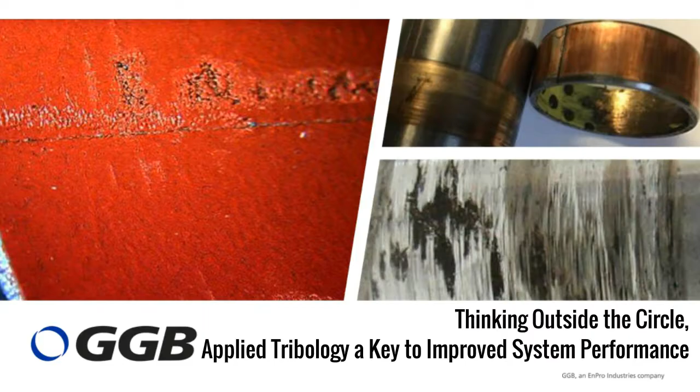Thank you very much. So today's slides are about thinking outside the circle, applied tribology, a key to improve system performance. But in the next slides, I want to quickly give you an introduction of GGB, what we can offer, and to whom we belong. GGB is proud to be a part of EnPro Industries.

Who is GGB? GGB has more than 115 years of experience in providing solutions to reduce friction, optimize product design through innovative plain bearing technologies. GGB can offer comprehensive selections of products to meet the world's most demanding surface engineering needs. We manufacture metal polymer, engineered plastics, fiber reinforced composite, metal and bimetal bearings, along with a range of supporting assemblies like bushing blocks and thrust plates.

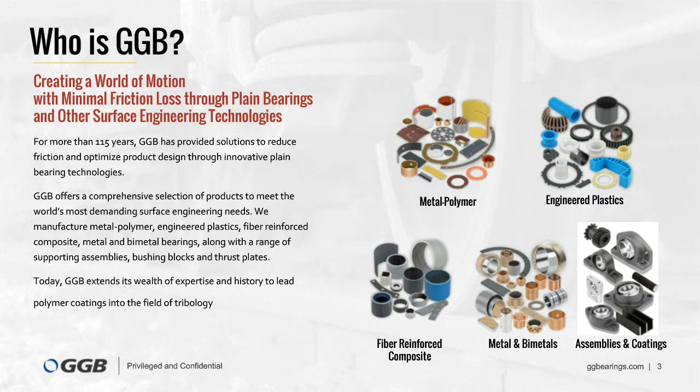Today, GGB extends its wealth of experience and history to lead polymer coatings into the field of tribology. The advantage of working with GGB is that we are your complete tribological service provider for the following industries: aerospace, automotive, industrial, agriculture, construction, oil and gas, energy, fuel, fluid power, primary metal, recreation, solar, and packaging.

Our comprehensive approach to understanding the complex science of interacting surfaces represents GGB's evolution from a parts supplier to a global tribological consultant. We proudly provide both manufactured components and engineering expertise to help our customers with their unique needs to create better surface engineering solutions. Our comprehensive understanding of tribology allows us to apply our expertise to any surface regardless of shape and material.

With this being said, I want to hand it over to my colleague, Marco Enger.

So thank you, Andreas, for the introduction. Before we get started, I also thank everyone for joining this webinar. Today's presentation is part of GGB's Tribology University, or in short, GGB's TriboU. The idea of TriboU is to share knowledge around tribology and all related subtopics. The topics normally cover the basic theory about tribology. Other topics focus on applied tribology and how this can be used to improve the performance of tribological contacts and thus the performance of mechanically engineered aggregates. So today's presentation is of the second nature, but don't be afraid, I will do a short introduction into tribology before we get started with the applied tribology topic.

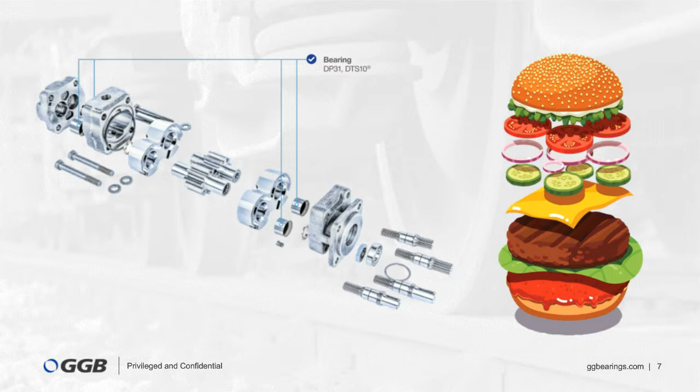So let's start with some basic theory about tribology. The first important thing is to understand what's behind the science of tribology. So the best way is to take a look at the definitions of the term tribology. The first definition is the easiest: tribology is the science of friction, wear, and lubrication. The most common definition is the science of contacting surfaces in relative motion and all related topics and techniques.

Another definition which I really like is that tribology is a multidisciplinary science in which advances are made by collaborative efforts of diverse scientific fields. So tribology is often accompanied with mechanical engineering, manufacturing, material science, medicine, chemistry, and physics, and many more. This sounds very complex, but I will try to give you a brief overview of the main ideas behind tribology and how we can use that to improve the system.

The interesting thing about tribology is that we can find it nearly everywhere. So during the next slide, I will introduce a few tribo contacts found in many daily routines we have. And I'm pretty sure you will be surprised how many contacts you can identify after seeing that slide.

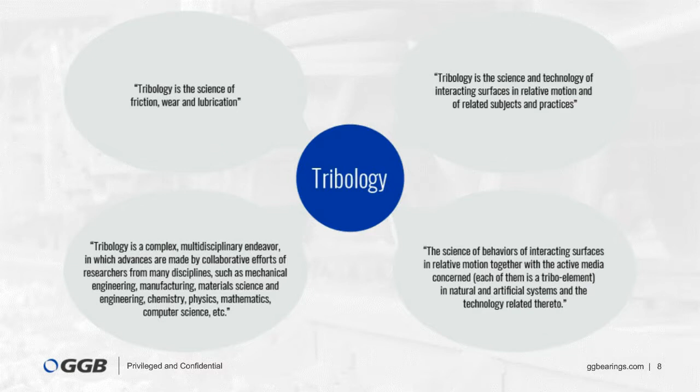Using the car to drive to work is also accompanied with tribology. A car is a very complex vehicle containing many tribological contacts, and one very well-known contact is between the tire and the road. The human body also contains many tribological contacts, so each joint in the body of a human is a tribological contact.

Braking systems for bicycles or cars are also very important tribological contacts. Walking or ice skating is also a nice phenomenon of tribology. Walking or running would be impossible without friction. Ice skating would not work when the friction would be too high.

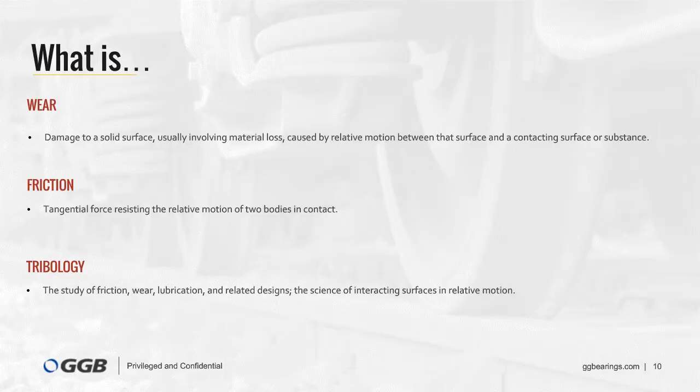This means that one surface is normally softer compared to the other surface, and this is based on design requirements. So the soft surface is normally the bearing material, and this is because replacing a bearing is normally the cheaper solution compared to a whole shaft replacement.

The other aspect is that we use softer materials, since normally these bearing materials work better in dry running contacts when they work against a harder opposing surface. For the bearing materials, we can find a vast variety of different materials.

A typically used material concept is the metal polymer composite. We can also find polymer composites in such tribological contacts. Coatings are also a great material family to lubricate tribological contacts, and other materials like fiber reinforced materials are also used for these dry running contacts.

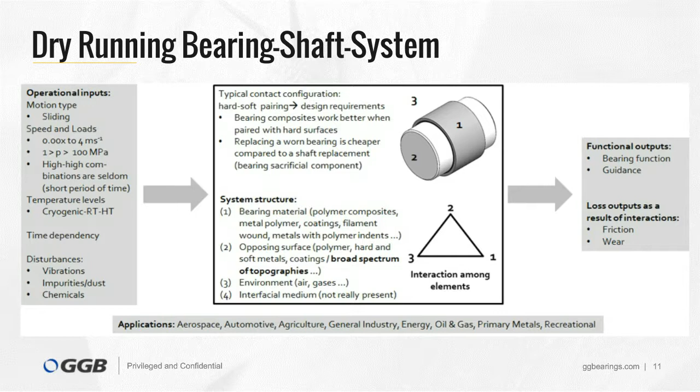At first glance, the counterface is a surface which attacks the bearing material during the relative motion. In reality, we never find optimal surfaces. What does this mean? Based on an engineering perspective, we always face technical surfaces in real applications. So if we discuss the impact of metallic counterfaces on friction and wear, we discuss the impact of metallic technical surfaces. The main purpose of technical surfaces is the geometrical limitation of technical components.

Other treatment processes like coating add an additional layer on top of that. Each single layer exhibits its unique chemical and physical property profile. In addition to that, the topography is also an essential characteristic of surfaces.

We often distinguish the topography in two ways. We can say that there are some surfaces which have an isotropic and anisotropic characteristic. What does this mean? Isotropic means that the topography has no orientation. We can also say it has a random structure, or that it's equal in each direction. For an anisotropic surface, we have exactly the opposite, so their roughness peaks and valleys have a preferred direction.

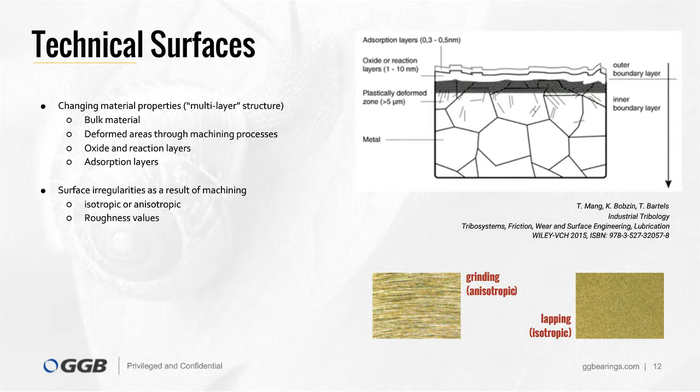So far, we already learned that surfaces have their own physical and chemical nature. We also know that surfaces exhibit surface irregularities. So what happens when such surfaces contact each other?

From a macro perspective, it looks as always. On this sample, we see a steel ball on a flat steel surface, and it seems to be an ideal contact. The microscopic view, however, shows that the surfaces only touch each other in those areas where we have these protruding surface irregularities. We tribologists call the sum of all these small areas the real contact area of a tribological contact.

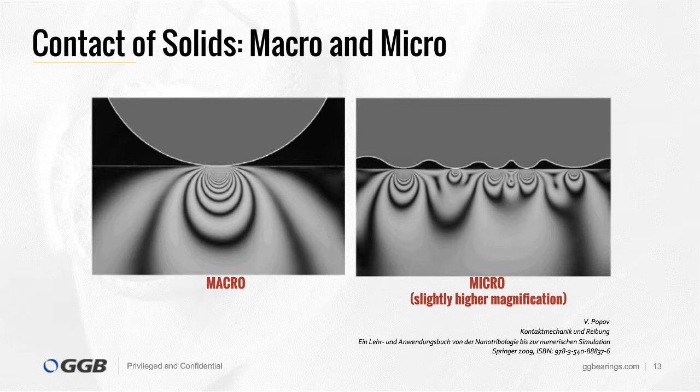The physical and chemical processes responsible for friction and wear are known as friction and wear mechanisms. As already stated, they occur at the microscale level of two contacting surfaces, in those areas where we have the contact of surface irregularities.

In tribology, we distinguish 4 main friction mechanisms and 4 main wear mechanisms. The friction mechanisms are adhesion, plastic deformation, plowing, and elastic hysteresis and damping. The adhesive friction component is a result of the formation and destruction of adhesive bonds within the real contact area. The 3 other mechanisms are based on a deforming interaction of asperities.

This brings us to the double nature of friction. Simplifying it, we can say that friction is the sum of an adhesive component in combination with a deforming component of friction.

The wear mechanisms are adhesion, abrasion, fatigue, and tribochemical reactions. The typical wear patterns are shown in the images below. Cracks are typical wear patterns for fatigue, often a result of repeated stressing of the surface.

Abrasion often leads to grooves and scratches because the harder asperity penetrates into the softer surface and furrows it throughout the relative motion. Adhesion often causes seizure and material transfer because of the formation and destruction of adhesive bonds. Chemical reactions can lead to particles which can also act as an abrasive in the tribological contact.

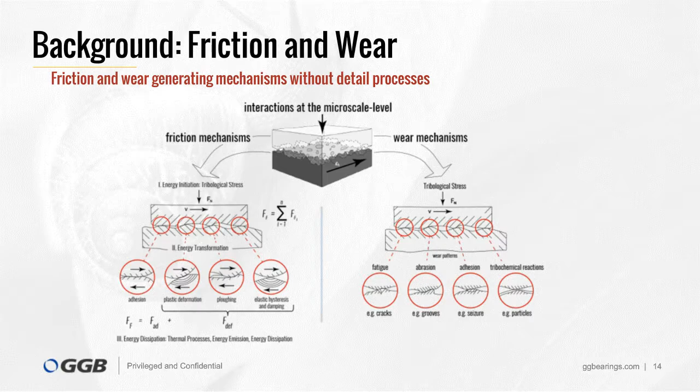Today, we will be looking at the impact of the counterface topography on the performance of bearing materials. Due to the vast variety of anti-friction materials, we decided to show you the impact on 2 typically used materials in bearing applications.

On one side, we have the metal polymer composite. This material is heterogeneous with a multi-layer architecture. Starting with the metal backing for high mechanical strength, we have a porous sinter structure which provides two things: high wear resistance, and at the same time a mechanical interlocking system for the slide active bearing liner. The bearing liner is normally composed of PTFE plus other fillers.

One important feature of this material is that it generates a protective transfer film on the counterface, which then protects the bearing material from further damage by the counterface. The second material we investigated is a typical polymer compound.

It consists of a thermoplastic polymer matrix, slightly modified using PTFE particles. The microsection shows that the PTFE particles are homogeneously distributed within the thermoplastic matrix. We know that this material can also form a pretty stable transfer film on the counterface.

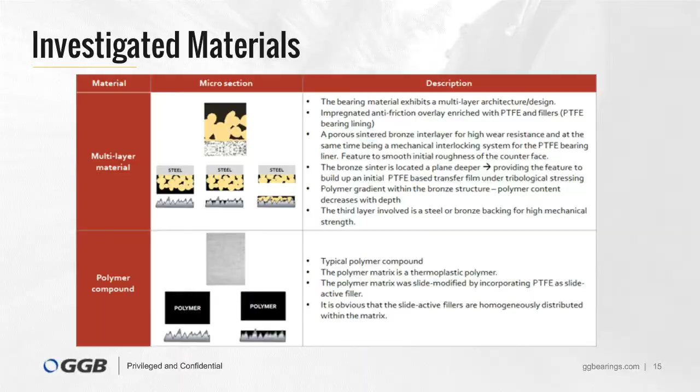During the last slide, I mentioned the word transfer film, and in that context I used the term protective. Transfer films are rather important for the sliding performance of a dry running contact. On this slide, I would like to explain a bit more about transfer films.

Most polymers and composite surfaces are worn by a harder counterface when used in tribotechnical systems. The inevitable wear of these materials when sliding against the harder counterface generates debris. The wear debris can escape from the tribo contact, but normally we hope that it stays in the tribological contact and deposits onto the opposing surface.

When the wear debris sticks, it can form a transfer film which protects the bearing surface from further damage by the attacking counterface by reducing its wear actions. So almost all tribologically optimized bearing materials exhibit the feature to establish a transfer film when sliding against the harder counterface. The transfer film is a very thin polymer or polymer-metal layer on the counterface.

Its thickness is approximately 100 times thinner compared to a human hair. This relation is given on the right side: the big circle represents the diameter of a human hair, and the small dot underneath shows the thickness of a typical transfer film. It looks like a pixel error, so don't worry, nothing wrong with your PC — that is the thickness of a transfer film.

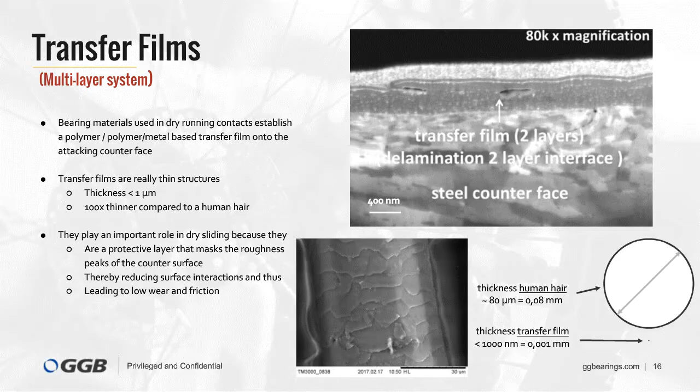Tribological testing is often indispensable when investigating interactions among elements of a tribological system. So we used wear experiments to describe the impact of the counterface topography on the performance previously described.

We used a flat-on-flat test configuration, realized through a pin-on-disk setup. The image on the left shows a schematic illustration of such a test setup. In this test, a small test sample pin is pushed against a flat rotating disc.

In our configuration, the pin is the bearing material, and the steel disc was made of hardened 42CrMo4 steel. This steel disc had different topographies, and the topography spectrum encompasses typical variants used in bearing applications.

On the one hand, we had a linear flat ground counterface, and on the other hand, we used concentrical grinding to produce the topography shown on the right side of that slide. Both surface finishing methods generate typical anisotropic surfaces, with a clear orientation of the roughness peaks and valleys.

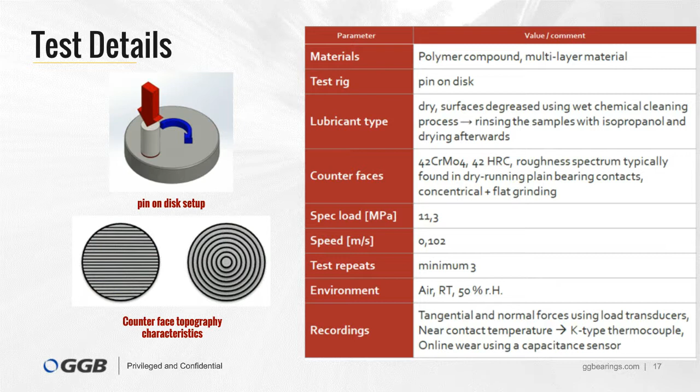So on this slide, we see the first outcomes. This slide shows the exemplary friction and wear curves of a polymer composite as a function of sliding distance. The friction is colored in orange, and the wear signal is in red.

Looking at the behavior of the material, it is obvious that this material shows two typical phases in friction and wear. In most tests, the contact starts with higher friction, which declines with progress in covered sliding distance until a steady state phase is reached. We can also call this phase the operational phase, which remains during the entire test duration.

The wear characteristic can also be divided into two stages. The first phase is characterized by a higher wear curve slope. The wear rate decreases until the operational performing window is reached, during which we find a linear wear characteristic for the wear curve.

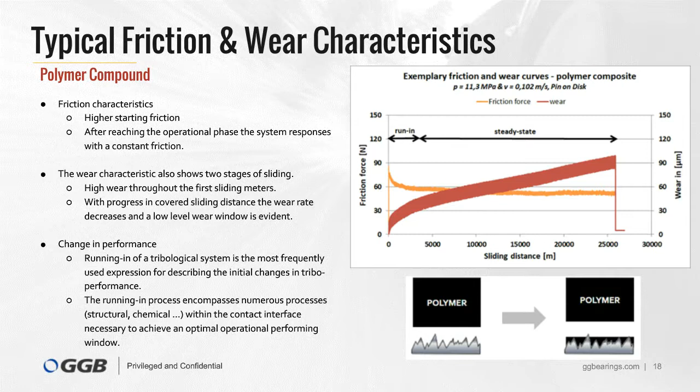This slide shows the typical outcomes in friction and wear for a multi-layer material. Normally, these materials show typical friction and wear phases during their wear life. So they often start with a low friction level, which can be attributed to initial friction with a high content of PTFE. The duration of this transient phase strongly varies from experiment to experiment.

Both the variation in polymer overlay thickness in combination with the variances in counterface topography are two dominating factors for this phase. After this short initial period, the friction characteristic changes, and we see a clear increase in friction. This is caused by a structural alteration at the interface of both contacting surfaces.

During the first sliding meters, the PTFE-based overlay wears and is partly transferred onto the counter surface, resulting in an exposure of the subjacent bronze structure. The bronze structure is now directly contributing to the sliding process, resulting in a PTFE-lubricated bronze-steel contact, which now responds with higher friction.

This phase is often followed by a fluctuating friction characteristic, which we can explain by an ongoing running-in process, including the establishment of a bronze-PTFE containing transfer film. Usually after that, we have a steady-state friction phase, which we can also call the operational performing window of this material.

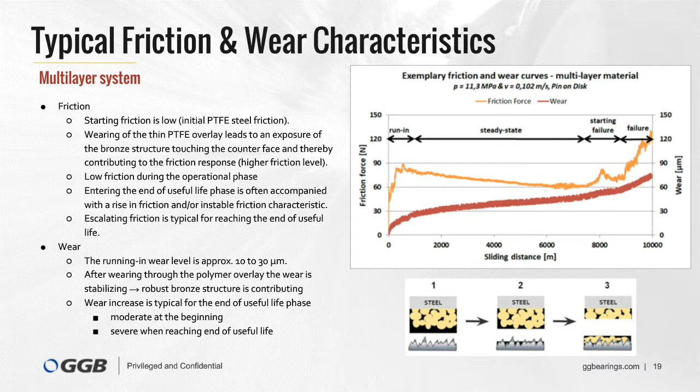This shows you the wear performance of a polymer composite as a function of the counterface topography. It is clearly visible that the counterface topography is a dominating factor when experiencing high polymer wear. High wear of a polymer is often accompanied with a shorter life cycle and thus critical for the application. The experiment showed that wear rates were measured in the range of 2 orders of magnitude.

So what are the impact factors? We measured 2 to 4 times higher wear when the polymer surface was stressed with a linear ground counter surface. For this counter surface, the polymer pin is stressed twice in roughness orientation and twice against the roughness orientation. Stressing against the roughness orientation is seen as the origin for high wear because we induce a lot of abrasive interactions.

Another general trend is visible: higher wear at higher roughness heights. This can also be explained by the amount of abrasive-induced wear actions. The rougher the counter surface, the more abrasive interactions we have.

In one of the introduction slides, we explained that polymer composites need to form a protective polymer film on the counterface to reduce its wear actions. So another hypothesis could be that rough surfaces just prevent the formation of a protective film, and the missing transfer film would explain the immense increase in wear at higher roughness heights.

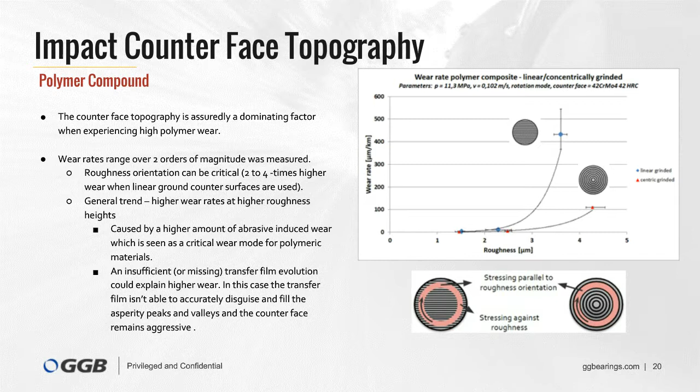This slide shows the impact of the counterface topography on the wear performance of a multilayer material. It is obvious that the multilayer material reacts less sensitively to topography changes. The impact of the roughness height is also less pronounced, and the wear rates are comparable for both a linear ground shaft and a concentrical ground shaft.

How can we explain that this material is just less sensitive to a topography change? In one of the slides, I explained that this material has a multi-layer architecture. We know that the top layer wears during the first sliding meters. This leads to an exposure of the underlying bronze structure, and we know that this bronze structure is very robust and has a very high wear resistance. Further, this robustness potentially helps to initially smooth the steel counterface, making it just less aggressive.

We also know that these material concepts form a pretty stable and robust transfer film, and we know that such high quality transfer films help to effectively protect the bearing surface from damage by the attacking counterface.

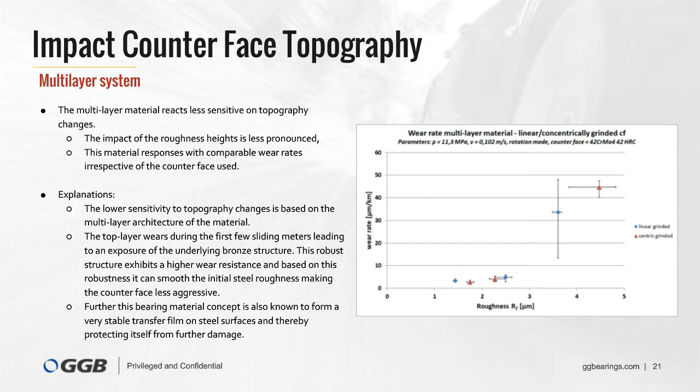The results showed that smooth counter surfaces led to low polymer wear. One of the hypotheses we had is that low to medium rough surfaces promote the establishment of a protective transfer film. Such a film reduces the wear actions, which then lead to low wear.

Looking on the right side, we see the wear readout of the experiment. We see that a smooth counterface leads to low wear during the operational performance phase, and again we can explain this by the formation of a transfer film. We see this formation of the transfer film in the SEM image below the graph. The dark areas of this image are the transferred polymer on the steel surface, and the light areas of this image are the initial steel counter surface.

Despite that the transfer film incoherently masks the counterface, it reduces the abrasive aggressivity of the counterface, leading to an improved wear performance.

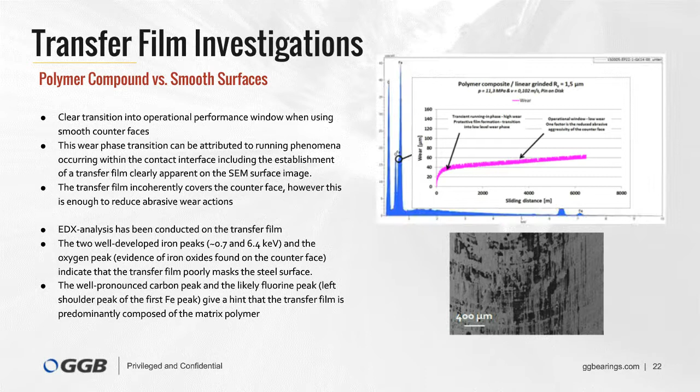We also investigated the chemistry behind the transfer film. For us, it's always important which part of the polymer transfers to the counterface, and we did some EDX analysis to get information about that. So what we see here is that we have two developed iron peaks and one big oxygen peak.

This explains what we see in the SEM, that the transfer film poorly masks the steel counterface - these are the information of the steel counterface. What we also see is that we have a well-pronounced carbon peak, and we also have a likely fluorine peak, which is the left shoulder peak of the Fe, giving a hint that the transfer film is predominantly composed of the matrix polymer with a contribution of PTFE.

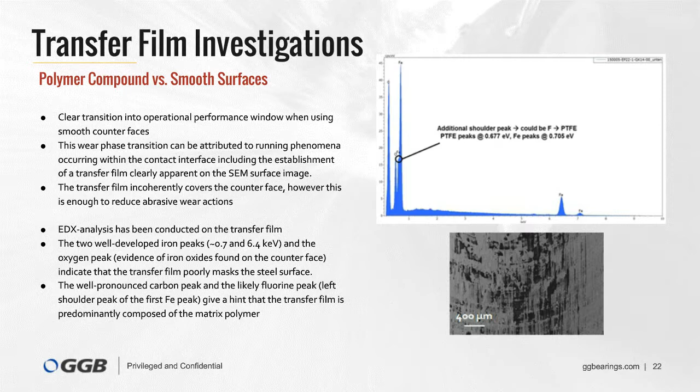Previous results also showed that rough surfaces lead to an enormous increase in system wear. An increase in roughness height can lead to an increase in abrasive-induced wear, especially when a softer material slides against a harder and rough counterface.

Abrasive-induced wear is seen as a critical wear mode for polymer-based materials. We also speculated that a rise in wear is a result of a missing or insufficiently formed transfer film.

To corroborate these statements, scanning electron microscopy was applied as before. What we see here on the right image of the SEM is that we don't have any transfer film. The only thing we can see is polymer-based wear particles not forming a transfer film, so this surface is still aggressive in terms of abrasive-induced wear actions. We can explain the higher wear based on a missing transfer film.

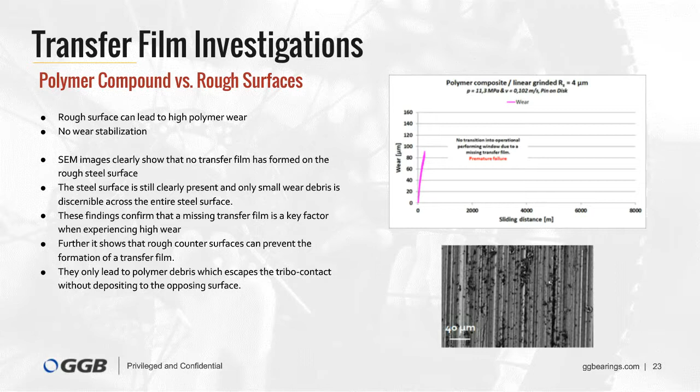On this slide, I would like to show you the transfer film investigations we did on the multi-layer material. The SEM image of the counterface shows a well-developed transfer film that continuously covers the counterface, disguising all the initial grinding marks. We can't see any grinding marks that were present before, so only minor areas of the original metallic surface are still present—these are the light areas. This covering of the protruding roughness peaks effectively reduces the abrasive wear actions into low wear.

We also investigated the chemistry behind the transfer film. What we see here is that we have an abundance of the following elements: C, O, Fe, F, Cu, Sn, and many more. The low peak of Fe is an indicator that the transfer film is really covering the whole surface. We also see other elements coming from the PTFE, bearing liner, and the bronze structure, so the transfer film is composed of the bearing liner plus bronze.

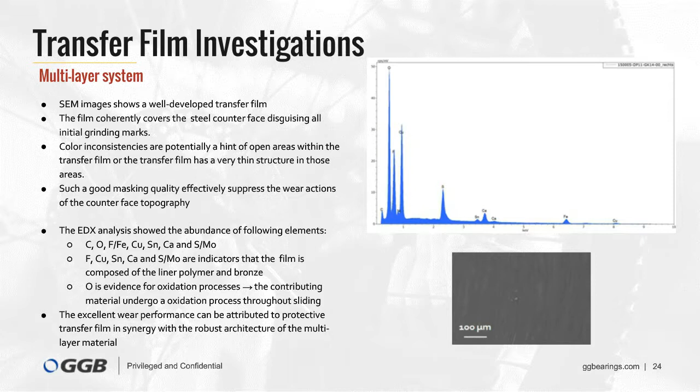So now I come to the scientific conclusion of this talk. A change in wear performance can often be explained by a change of the acting dominating wear mechanism in the contact. We found out that polymer-based materials can react very sensitively to a topography change of the attacking counterface. Abrasive wear actions are seen as a critical wear mode for polymeric materials.

We also have seen that transfer films are important for optimal sliding because they protect the bearing surface from aggressive wear actions of the counterface. To conclude, I think the presentation showed one important thing: even a small change of a tribological system can lead to a massive change, even if it's only a change of a few micrometers in the topography.

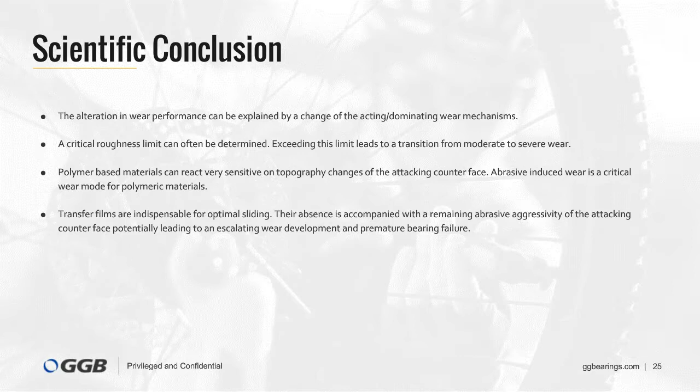We have a big group of local application engineers and a huge team of material designers and tribologists, so we provide an excellent technical resource you can collaborate with. Thank you very much for your attention, and I think the talk is now open for discussion.

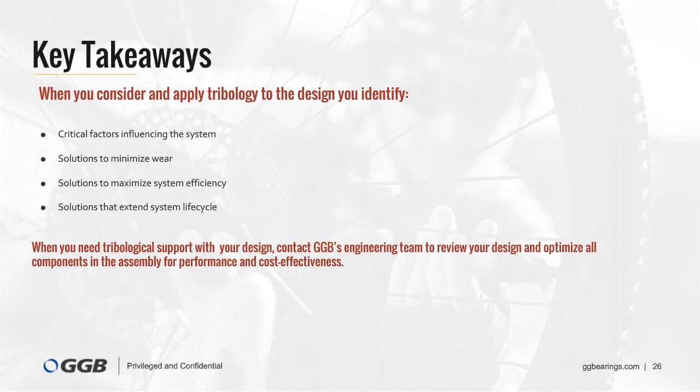At the moment, we do have more than 40 active test rigs available at GGB. We use them to describe the performance of our products or do some fundamental research work, like this one. We have three different testing categories: simple model testers, which was also the basis for this investigation, and we also have simulation and component testers.

And Marco, is it possible to customize available test rigs? Yes, we do have the possibility to tailor our test setup to the needs of an application. We call this customer or application-related testing. We know that friction and wear are system properties, and we achieve a much better transferability of friction wear results when adapting the system to simulate the real application. So yes, we can do that.

Okay, and I want to move on to some material questions here. Why is a multi-layer material more robust than a polymer? That is a pretty good question. It depends on which kind of multi-layer system we use. We have two classical systems: one with a thin overlay and one with a thick polymer overlay. In this research project, we investigated the thin variant.